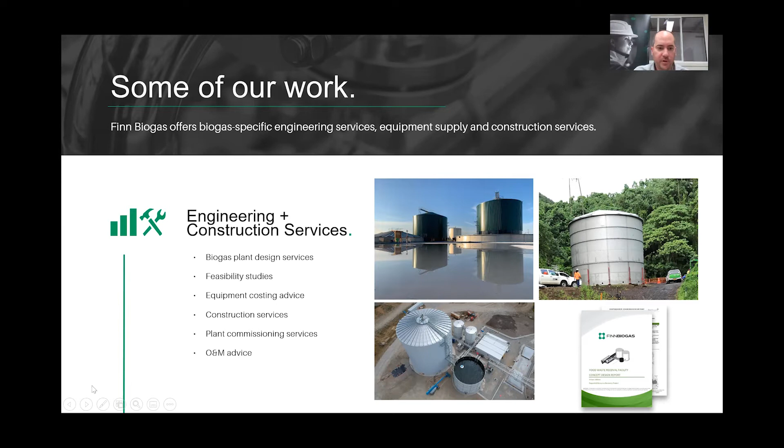All right, enough about Finn Biogas. I'm sure you're not here just to hear me talk about ourselves. So what I wanted to do is get into some of the basics of biogas and give everyone a first cut at understanding what biogas is, how it works, and then we'll chat a bit more about how that can work for the dairy industry in Australia.

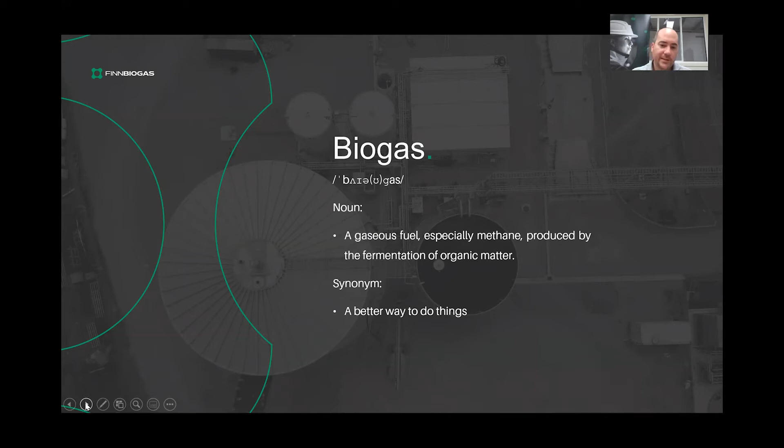So this might be basic for some of you, it might be a rehash, it might be completely new for you. So for those that it's completely new for, I thought I'd start at the very beginning with understanding what biogas is. So biogas is a fuel that's predominantly composed of methane and carbon dioxide, and it's produced from the fermentation of organic material. What we like to say around here is it's a better way to do things.

We take that gas and we either produce electricity, or we can do a number of different things with that in terms of fueling vehicles or offsetting natural gas use. And then as part of the process during the biogas production, all the nutrients that went into the system also come out of the system. So we're able to capture that nutrient value and in turn circle it back around to agricultural land as a fertilizer product or a soil conditioner.

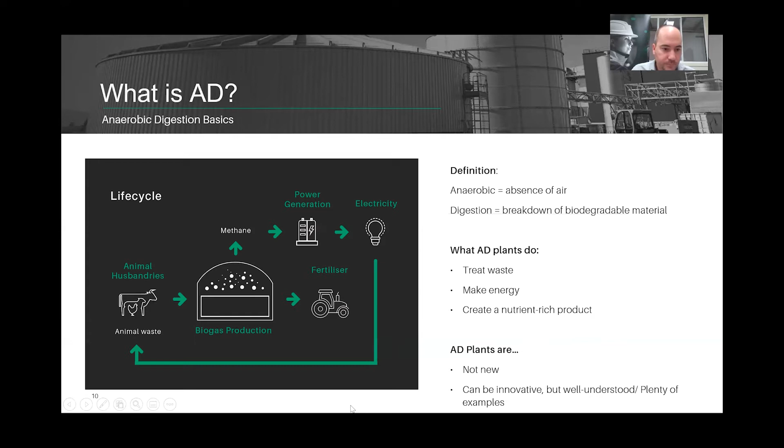So like I said, we produce energy in the form of biogas. We can use that for production of electricity, for industrial heat, for production of biomethane or renewable natural gas to offset natural gas, and then also take that to vehicle fuel. The other part that comes out, the digestate, is a nutrient-rich fertilizer, and we can take that to land.

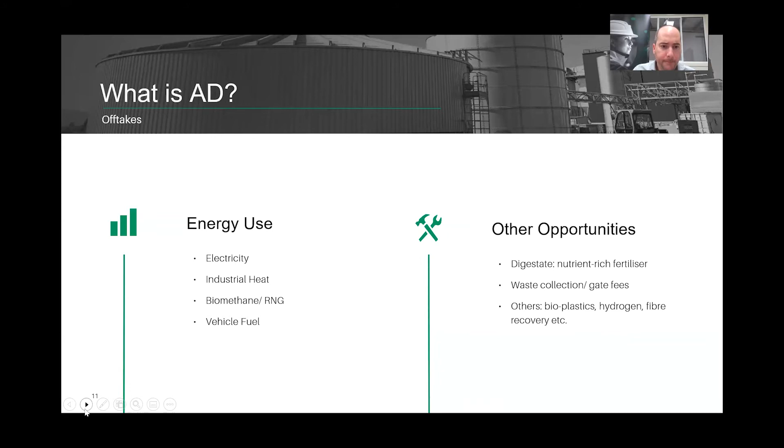But there are other opportunities associated with biogas plants, such as generating income through gate fees, or taking intermediary products of the digestion to things like production of bioplastics, hydrogen, fiber recovery, and things like that. So lots of interesting things that you can do with biogas, and biogas plants themselves come in all different shapes and sizes.

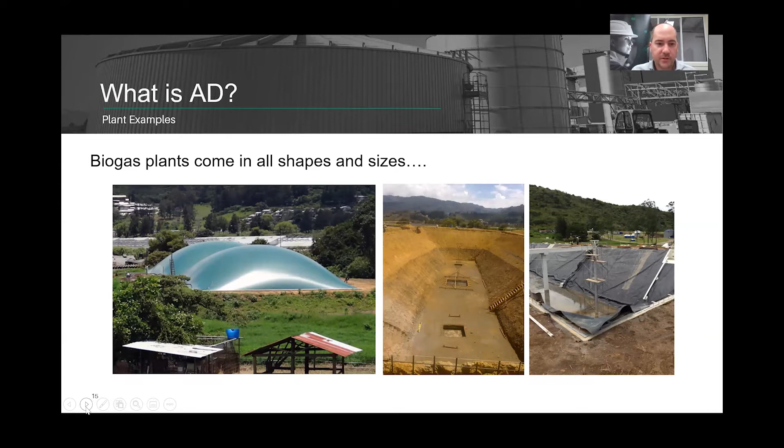So let's start with number 1. I think it's really important to understand that with any kind of biogas project, there's site-specific economics, and understanding these economics can really allow you to exploit the opportunities of that plant.

We can use a biogas plant to generate electricity on site, and that allows you to create a form of energy independence, and also hedge your bets a little bit against rising prices of energy. There's also some untapped revenue streams within your business, possibly, and AD will help you tap those revenue streams and diversify your income a little bit.

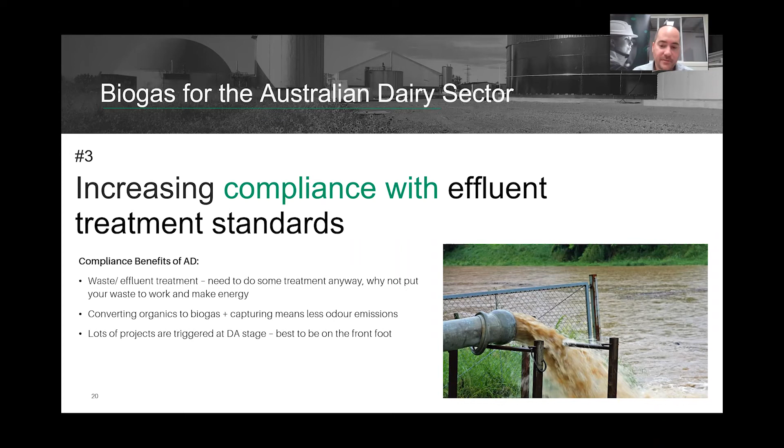So obviously in the news recently, there's been a few examples of dairy farm-based biogas plants in Australia. I don't know of too many of them, to be honest with you - I think it's an interesting developing market in Australia. But I've seen there's a biogas plant planned for Nowra, which I think is 18 farms that are all conjoining. They're all dairy farms - looks like quite an interesting project.

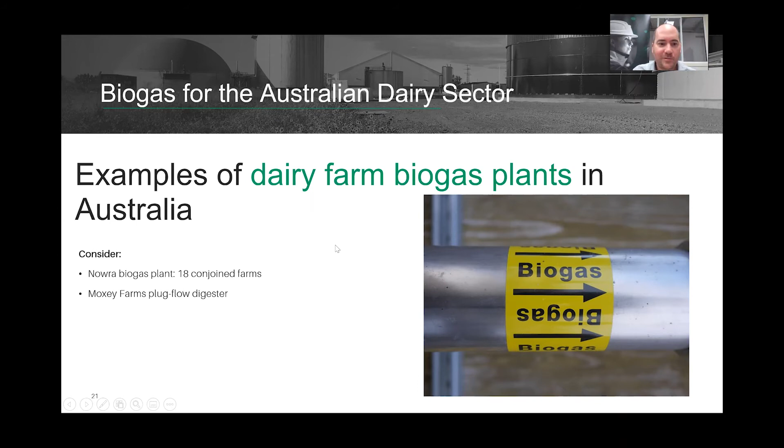And I believe Moxey Farms also has a plug flow digester, just from what I've seen online. I think we might even have someone on the call from Moxey. So if you are, maybe you can shed some more light on that if you'd like to a bit later on.

All right, so we've talked about what biogas is. We've talked about some of the benefits that you can expect from that. What next? What are the first steps you take? How do you go from watching a webinar, reading stuff online, to starting to investigate putting a biogas project in on your site?

What I think is really important is to get the basics down first. So start with the drivers of the project. Understanding the drivers of your project is really key to success. Are you trying to make return on investment? Are you trying to just treat and manage your waste properly? Are you trying to generate energy security, or something else? Understanding that will help shape and drive the way you go with your project.

There are some secondary drivers too, around energy security, nutrient recovery, green credits, etc. I think the other really important thing to do is decide up front on your appetite for complexity. There's a lot of talk about aggregation of waste from different sources, bringing waste onto farm, understanding your market exposure, biosecurity - all these types of things. I think it pays to sit down and understand, within yourself or your business, what that appetite is for complexity before you move too far down one path or the other.

Once you understand all of these things and put them together, that really starts to drive your project - the things I talked about earlier. Do you want a tank-based system, a lagoon-based system, a high-rate system? What's your complexity? What's your risk allocation between the different parties? And ultimately, what's your outcome? What's your cost, and what's your return on investment?

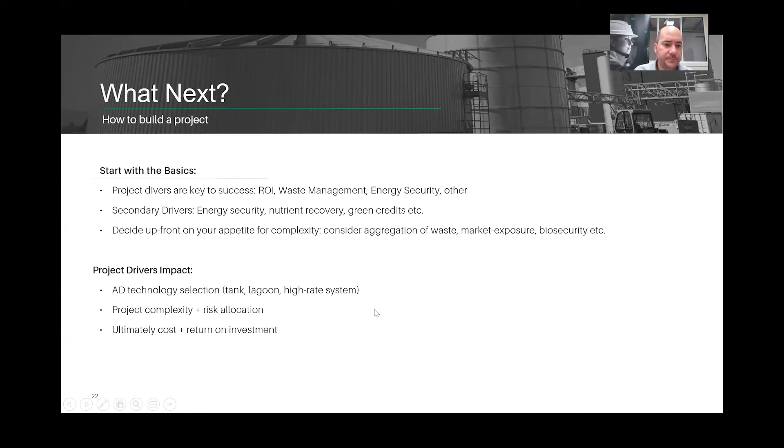So once you've done that, we would very strongly suggest the next thing you need to do is undertake some kind of feasibility study. This is a study you can do on your own, or it's something that companies like Finn Biogas do - we can help you with that, absolutely.

In this stage, you need to gather as much data as possible on your operations. You need to get together the right team internally within your business. And if you need to consult out, get subcontractors in, get consultants in, get experts in - it's probably a good time to start looking at doing that in the feasibility stage.

I'd also suggest during that time that you really engage with regulatory bodies and other stakeholders, so you can start to head off those conversations early, before your project goes too far down the path. So during a typical feasibility study, pre-feasibility study, front-end design, you really need to start to flesh things out.

What are you going to do with the energy you produce? What are you going to do with the digestate? What's the best use of those? How can you get the maximum value out of them?

Along with that, you want to understand what scale of plant makes sense for you - not only to build and construct, but also to own and operate. What are the downstream benefits? What are the upstream benefits or consequences of putting a biogas plant into your process? And what are the project's risks, and how do they change through the project lifecycle?

So for now, I would start with that, and understand what's for now and what's for later. There's a lot of really cool stuff you can do with AD, like I mentioned before - bioplastics, CO2 recovery, biomethane, hydrogen upgrading, etc. You need to understand where those technologies sit within the project lifecycle, and what makes sense for you from a complexity point of view.

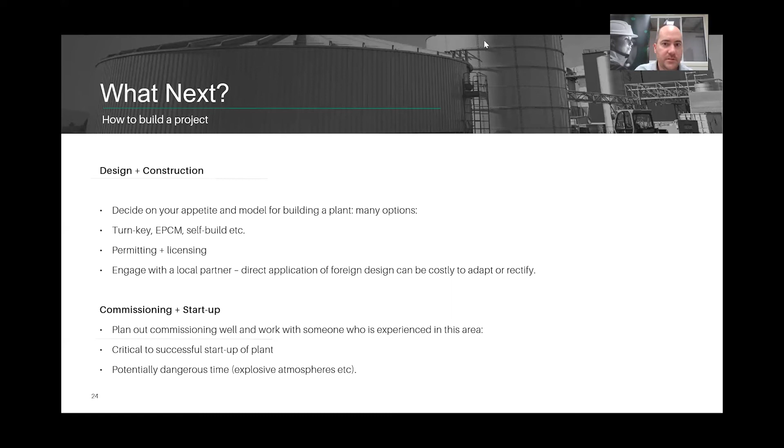Just a couple of tips - if you've built any project before, not just biogas or bioenergy, you'll know all projects are inherently complex. Expect things to change, timelines to blow out, problems to come up - that's totally normal. If you've not done this before, I can assure you 100% that's normal, and there's always a solution. It may not be cheap, quick or easy, but there's always a solution.

Get on board with the right team early. Get your internal team sorted out and get your consultants sorted out. Understand what the best communication, working style, and flexibility are. Projects are challenging, keep the faith, but there's a ton of great benefits to owning a biogas plant.

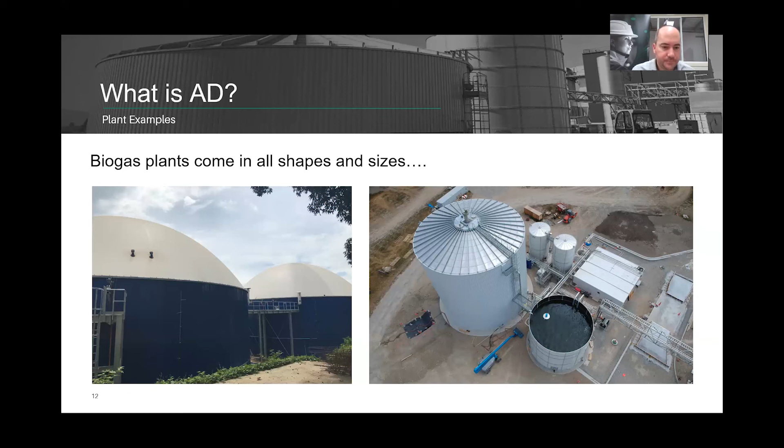These systems work well with very low solids concentration, things like piggery effluent, for example, where there's only a small amount of solids and a lot of water that kind of gets in the way - these work really well. I wouldn't advise putting a lot of solids into a lagoon.

The reason being is that you get solids settling to the bottom and solids floating, and that becomes a problem because you get stratification of the layers, you get a temperature profile, you start to kill bacteria because the anaerobic bacteria only lives within a certain temperature range. Then you potentially have problems with a crust forming, gas not escaping, not being able to mix a huge volume. It's really important for the bacteria to live in an environment similar to humans, in that we like the right temperature.

We like to have a consistent dose of feed, and for the bacteria it's no different. They want a temperature range and they want to be continually mixed so that they've got their food and the bacteria can access that. So good for things like piggeries, good for dairies, not so good for food waste and things like this.

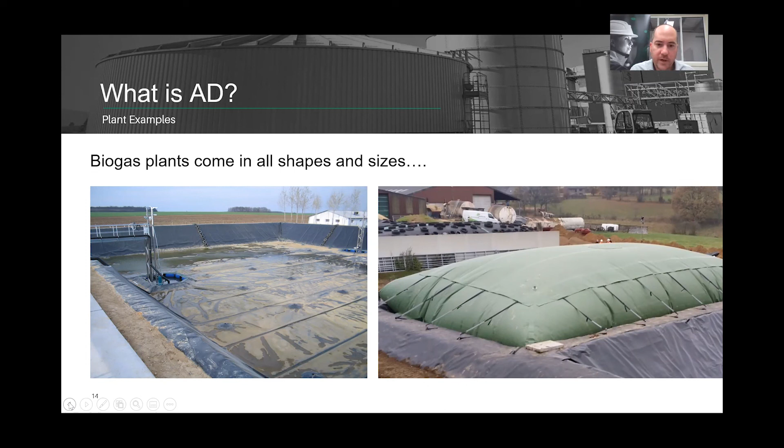These type of plug flow reactors are good for things that are much higher again in solids concentration. They're used typically for a lot of municipal solid waste, things like FOGO, things with a lot of contamination that you don't want to get caught in pumps and mixers. They generally have a lower retention time, but again they're heated and you mix them very slowly and push everything along. But they are generally more expensive to build, so they're used for municipal and industrial applications.

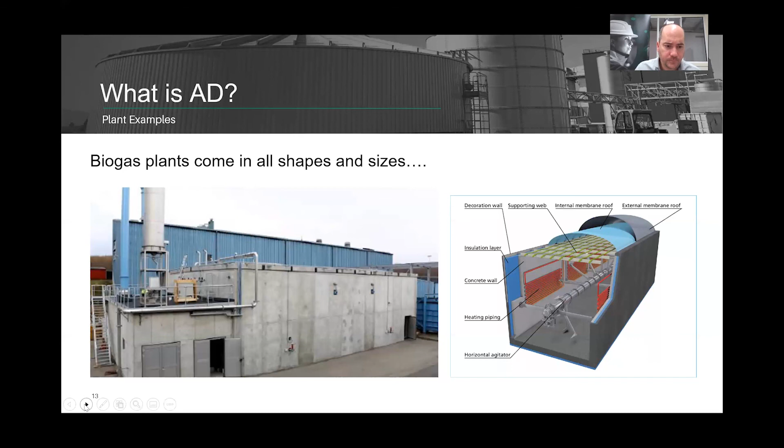These are normally used for applications in industrial food and beverage production, where there's high suspended or dissolved solids, but not necessarily a lot of particulate matter. So you can pass effluent through these relatively quick, which makes them smaller, on a smaller footprint. But again, they're rather complex and can be challenging to operate. Hopefully that answers that question, a long-winded answer, hopefully.

All right, next question: average time frame for design concept to full install. It depends really on the project complexity, but for a farm application, let's say a dairy application, you're looking at the 12 to 18 month window from initial concept, design, procurement, construction, and commissioning. And then larger industrial projects that we work on are generally 18 months to 2 years, something like that.

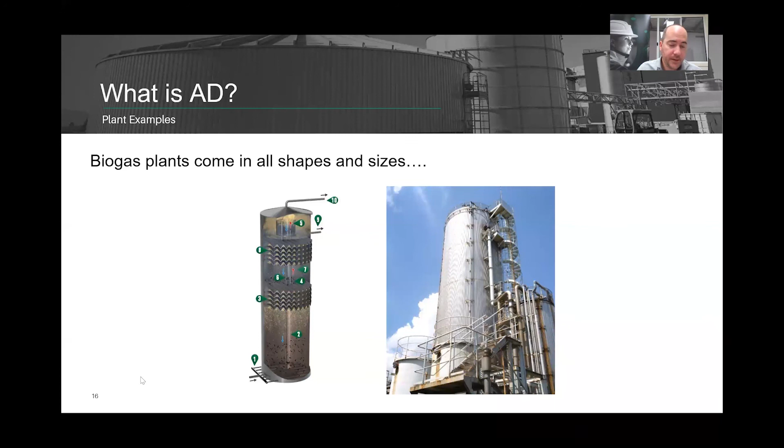So we work on some projects, for example, where the whole economics is based around providing gate fees - the client owns the site, someone comes and essentially pays a fee to dump their waste there, and that's how their economic model stacks up. Then we work on other projects where someone might be on a farm at the end of a transmission line - maybe they're getting load shedded off that line, maybe they're paying a premium for their energy, maybe they're importing diesel. There's a whole range of factors. Maybe they're paying to dispose of waste, and that sets up the economics in a different way than the previous example I gave.

So it's challenging, and it's always site specific. Some are driven by gate fees, some are driven by cost of waste disposal or waste treatment, some are driven by selling energy, and there's no hard and fast rule necessarily, and not always a direct match. Biogas is really great for lots of things, but it's not the be all and end all - I'm not going to sit here and tell you it's perfect for every condition. Unfortunately that's why you need to do a feasibility study, a site assessment type of work, to understand what works best for your site and what you're trying to achieve. It might be biogas, or it might be a combination of biogas and solar and wind, or it might be something else.